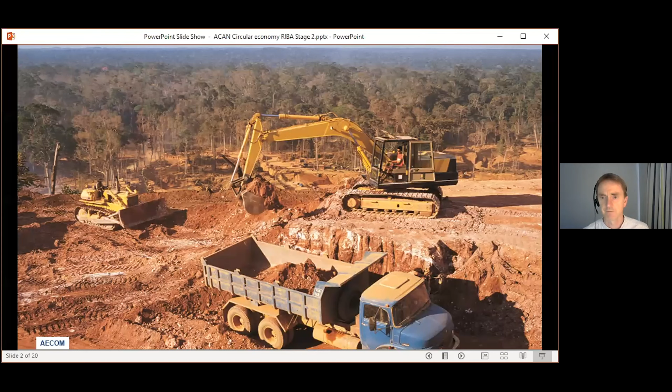So really, this is all about what we have at the moment, which is the linear economy, where we are digging a whole load of stuff out of the ground. We're mining all over the planet, and this is mining for bauxite to make aluminium, and this is in the Amazon rainforest, which just seems wrong on so many levels to be doing that.

And then the other end of the scale, equally wrong in many ways, seems to be that we're demolishing all these old buildings, and sometimes they're only 30 or 40 years old. You think, that is a huge amount of effort, resources, sleepless nights, time and effort that goes into designing and building, and then we end up with nothing much to show for it apart from a heap of crushed concrete that we can't even really use again. I mean, it's used for road bases or for piling mats and things, but it wouldn't become structural concrete again.

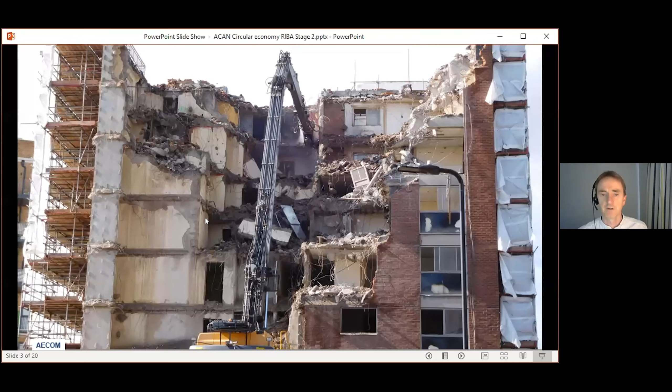So a lot of the time when we're talking about our great recycling, we're actually quite often doing what I'd call downcycling to a lower grade resource. And even the metals are the same, that quite often the alloys are recycled into a lower grade alloy than they were originally. So a lot of waste and a lot of resource use, and that's the nature of the linear economy we're in: dig stuff out of the ground, use it for a while and throw it away.

And I think that the whole premise of the circular economy is that we can start to close that loop and create a much more, keep and retain the value of our resources and materials, and ideally in perpetuity.

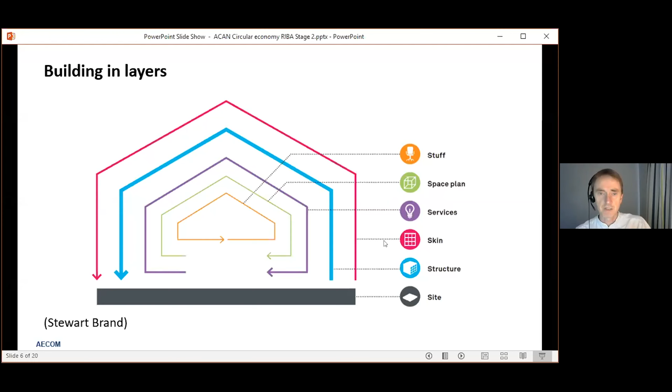If we want to maintain or replace the building services, some of which have a 20-year life, we don't want to hide them behind finishes that might have, say, a several-thousand-year life if it's a ceramic tile. So that's a very useful baseline—the building in layers principle.

To pick up another one, design for adaptability was really interesting to look at when I was researching the book—trying to capture some of the principles that came out of the research, and the idea that lots of old buildings have survived for a long time.

Victorian warehouses and Georgian townhouses are great examples. Some of the features are that they tend to have quite generous floor-to-ceiling heights, really good use of light and space, and feel good to be in—buildings we really like being in.

They have generous cores and are quite often rectangular in design, because that's easier to give you nice clear floor plates, but also makes it easier to build up or out on a rectangular plan form.

One thing we've been doing and promoting is this idea of scenario modeling—you take your existing design and say, what could we convert this into? Are there options to turn an office into a hotel or residential or whatever, and what are the implications of that?

I'm not suggesting every building should be able to be turned into a lab, because that would clearly be seriously over-engineering. But are there options, are there tweaks to the design that might enable it to be more adaptable in the future?

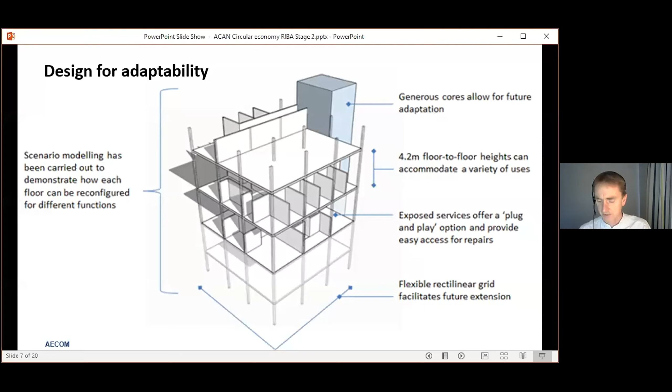There's a scenario modeling diagram—it's something we've been doing for Moorfields Eye Hospital, trying to build in some principles of circular economy and looking at how that building works.

That building has to be—the brief has asked it to be very adaptable, as they've got both UCL research in that building as well as live hospital functions. So they're looking to see how they might change out spaces in there and make it more adaptable, even to the point of having interstitial plant floors, for example.

Being able to change the facade away from—if you want to take out that plant floor at some point—to be able to change that back into a facade that could be used for wards or treatment space or whatever.

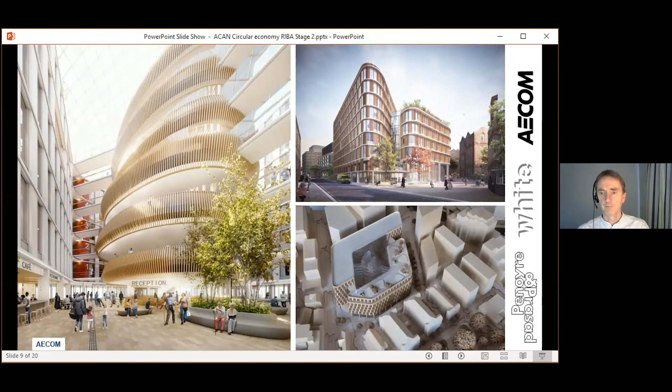And then in terms of design for disassembly, you can be starting to think about disassembling the whole building, and that's the big challenge, I think. At the moment, buildings are really not designed around disassembly in general. But this is just zooming down into the detail here.

So an example is a flooring system that is a dry lay floor tile, which is one of my favorites. It's laid onto a rubberized grid, and then there's interlocking tiles on top of that to create the whole floor. This is used in Heathrow Terminal 5, and it allows you to raise up the floor if you need to get underneath it.

If you've got a raised floor, it means you've got a tea point in a building you could move somewhere else. It means if you crack a tile a couple of months into the building's life, you can change it out without having to suffer it for the next 100 years or whatever.

What we found really interesting is, just imagine if the whole building or the whole interior was designed in that modular dry laid way. What was interesting about the costing, when we did a whole life cost analysis for UCL estates, is that they do cost more per tile, but it takes 2 days to lay this system whereas it would normally take 2 weeks. So as a comparison, you're saving a huge amount on the program and saving money in the process, because you can get straight back on and start your next fix.

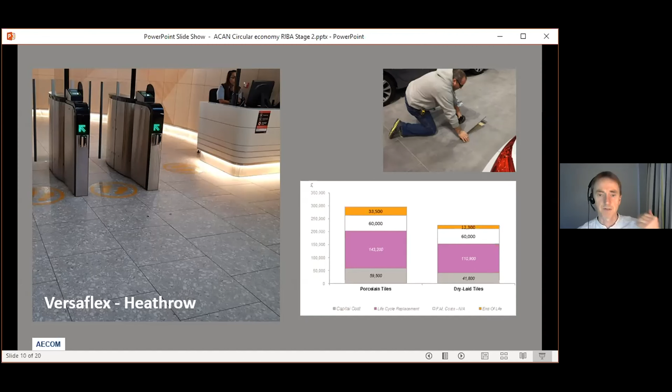Another cool one which just came out last year, I think it was in Edinburgh actually, is the K-Briq, which I think is really interesting. We've been looking at that for a couple of projects now. It's an unfired brick, made from construction demolition waste, and it has the same properties as a brick. I think it's doing a lot of the things we'd want a circular product to do, and by not being fired, you're using a tenth of the energy and a tenth of the carbon emissions of a traditional fired brick.

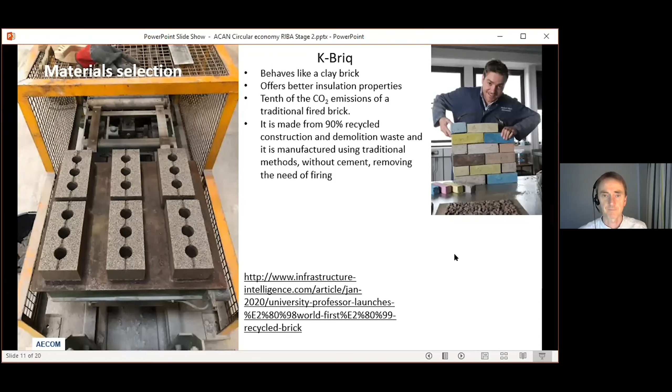Another example which I think is really catching on, and a lot of our clients are really interested in, is reclamation of materials. So this is raised floor tiles, 600 by 600, standard industry wide. There were thousands of them coming out of a building near my office, and I thought, oh great, maybe they're going to recycle or reuse these in some way. But actually, they started to rust outside and buckle.

So we looked it up and found there's one manufacturer called RMF who will actually take back your raised floor tiles that you don't need anymore. They remanufacture them, clean them all up, get rid of all the adhesive they've been coated with, retest them, and re-warranty them - that's absolutely critical for reuse. The problem is often that you don't have that backup from the manufacturer saying yes, this product is fine to reuse. They'll sell them back, and actually they're cheaper than new ones, roughly 25% cheaper.

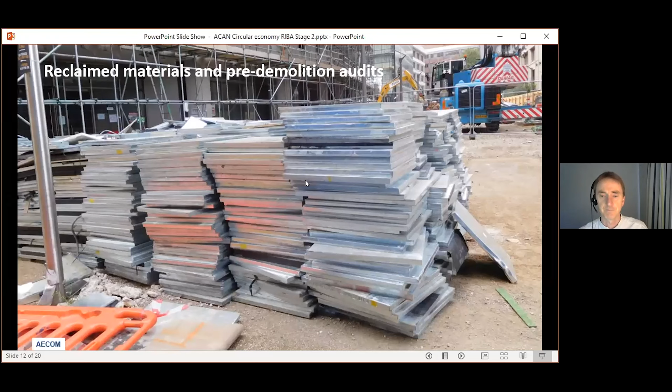So you think, crumbs, what isn't to like here? And actually a lot of our clients are agreeing and saying that they are going to reuse them. And then I think the other one that's really interesting is this idea around the way that we currently consume things.

So the manufacturer makes something, we buy it, and then we're responsible for the whole of the rest of its life. So we have to maintain it, upgrade it, and pay for the disposal. And something like lighting, for example, the disposal costs are a special waste, so it has to be looked after - it doesn't just go down the standard waste streams.

Lighting is another good example in that it's something that is moving very quickly as a technology, and upgrading has huge benefits. So this idea was used by a few people.

Philips have offered lighting as a service - it's called Payperlux - and Schiphol Airport do it. They didn't pay anything up front, and then they pay a monthly or quarterly charge for the use of the lighting. They even have models around energy efficiency, so not only is it a circular principle, but if your energy use goes above a certain pre-agreed amount, you pay less rent for that quarter or month, which I thought was a really interesting idea. I think lighting is difficult to see how that would work in lots of commercial buildings, but even residential buildings too.

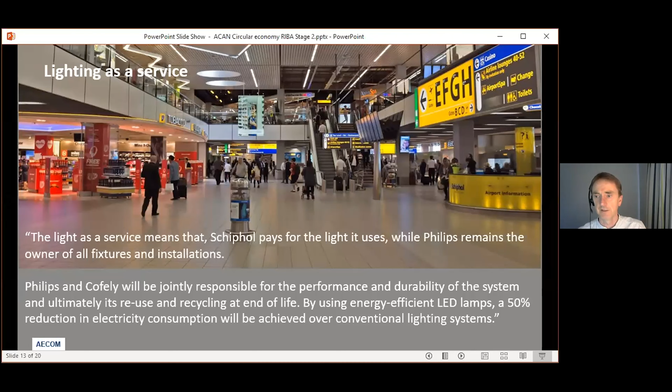I think the more general business models is another interesting area here that captures lots of things - remanufacturing. Remanufactured paint is something that's well up and running. Paint 360 takes waste paint from construction sites, and there's so much of the stuff that they are turning it away, and it's all pretty high quality. Generally we all spec high quality paints, so they get a very high quality of waste paint, and they can remanufacture it into any colors and any types of paint that you want.

What I love as well is that it's a social enterprise, and they are bringing people into work who probably wouldn't have been employed otherwise - so all round a really good one. It deals with a waste stream that is currently problematic and is quite often incinerated, or people just dump the paint on top of other waste, and it gets mushed in with all the other stuff on the skip. So lots of advantages here, I think.

What's been interesting is the take-up of circular economy ideas. There's lots of clients we're working with who've built that into their briefs now, and are looking very seriously at the advantages here. This is one example from Clarion Housing for their Merton redevelopment project, which I think is a 4 or 5 year redevelopment, and they've picked out some really key savings and some things you wouldn't immediately think of.

As well as saving loads of money on waste disposal and requiring much less virgin materials, they're also saving on impacting the local community by not having so many lorries thundering past other houses full of waste. So I think it's a really elegant solution, and very applicable to long-term regeneration projects.

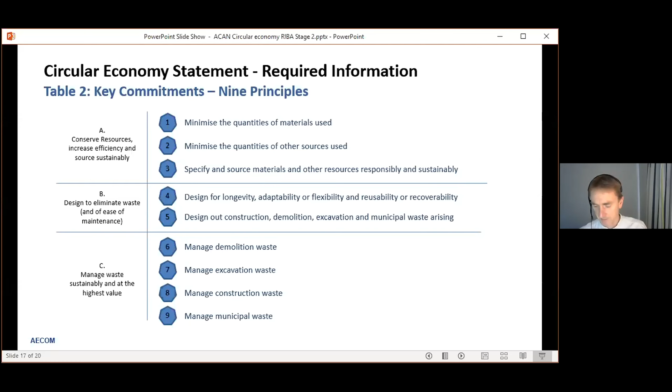I thought it worth mentioning - I've put a link in there. We've been working with some brilliant people at the University of Sheffield on creating the Regenerate tool, which is trying to help people at those early design stages think about and challenge the design, and think about what the circular economy opportunities are at those stages. There's a tool you can download and have a play with. It's still a downloadable spreadsheet, but we're working on a fully online tool that would allow you to go through the principles I've just talked about and pick out some interesting ideas - you'll see that soon.

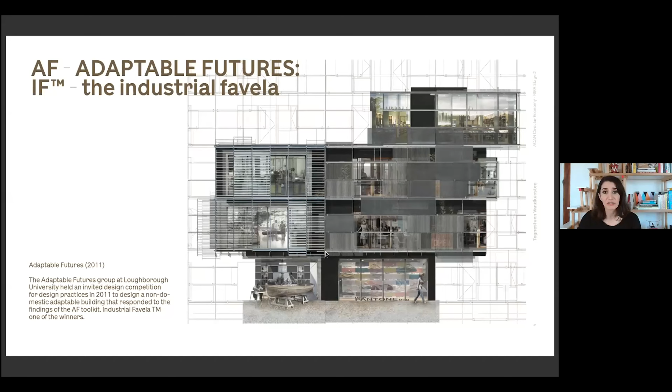I'm not going to show you the project itself, but one of the principles it was about: we have two different schools of architecture. Industrial production, which we architects know well, is a top-down structure, a vehicle to deliver building practice based on easy assembly technology, precision, affordability, and scalability. In contrast, we have the notion of favela, and regardless of the social status of the buildings or users, vernacular architecture is a bottom-up structure that functions based on local democracy, user control, individual actors, and do-it-yourself operators. So this project was a hybrid system of these two schools, taking advantage of both.

How? The backbone of this project was this diagram, and thanks to Dan and David, we learned a lot. I'm not going to focus on the left side of the line, which we went through already. It's about design for disassembly, layering, flexibility, multifunctionality, reuse, and recycle. We learned all these tools.

I would like to focus on the right side of the diagram, which is the social sustainability, and how it frames itself in the cultural context of the project to deliver the lovability quality. How we do it is that as designers, when we use all of these other tools, we put on the glasses and ask: how does this system work with the identity of the project? How does the combination of materials work with tectonic articulation and sensuality?

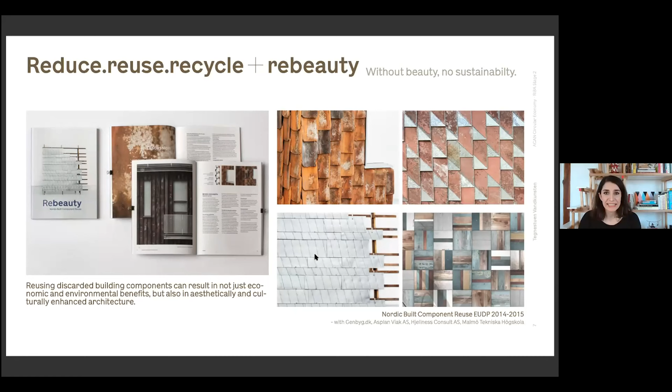We shouldn't forget that. These prototypes were exhibited in a Danish pavilion in the Venice Biennale 2018. For example, this is origami-folded metal plates. These are flattened ventilation channels, and we adore this sort of aesthetics. And here are reused roof tiles and reused windows.

We dived very deep into all of these 25 prototypes, and there's a publication you can download from our website. All of these designs are open source, so everybody can adapt them in their projects, along with all the business plans. It's researched very deeply, so if you like, you can take a look.

Another tool we use in our design phase, which we recently helped create, is this construction pyramid. The design phase is when we don't take final decisions, but many of the main decisions are made, and we shouldn't take wrong ones. This material pyramid is one tool that helps architects and designers in the design phase, and it's very easy to communicate. It's not very user-friendly to show LCA and LCC calculations in the early design phase to clients or users, but this is.

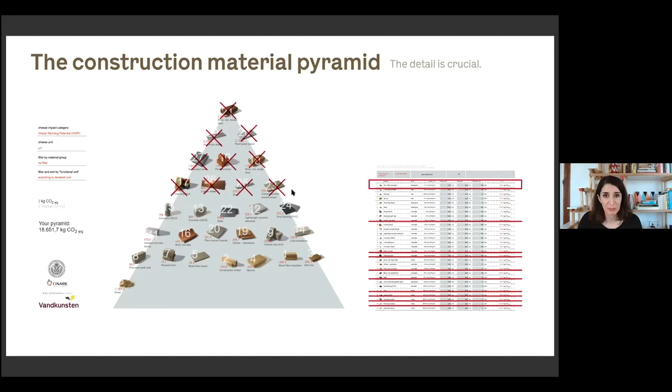This is based on the food pyramid that we all know. For example, at the top are the high-carb, sugary materials that you should minimize, and it's exactly the same here. At the bottom is the more healthy option. How can we have healthy buildings? It's a good tool to communicate.

And now, my darling project: Hall 7, which we did in 2016. It's located in Roskilde, in Musicon. Roskilde is around 40 minutes by train from Copenhagen, and Musicon is a district where the municipality has a very progressive agenda. It's going to be a new district centered on creative and cultural associations and institutions, and this is Hall 7.

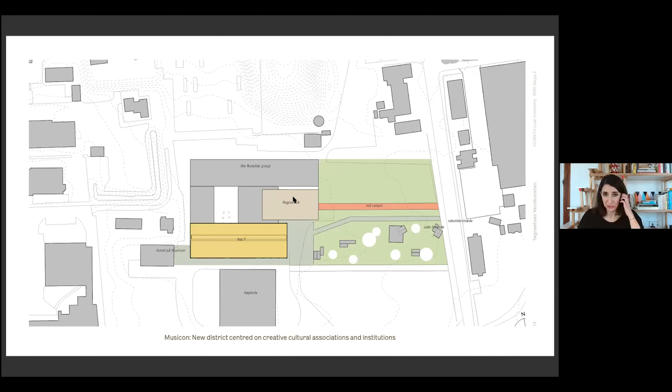This is Hall 7 to the left, and we have such a glamorous neighbor: a museum of rock music. The municipality gave access to this hall for only 10 years, so the project was designed to be temporary.

Makers had already some containers that they were using as storage. We thought, to minimize waste, why don't we give them more retired containers, so when these 10 years are over, they move out with these new containers, with these new facilities.

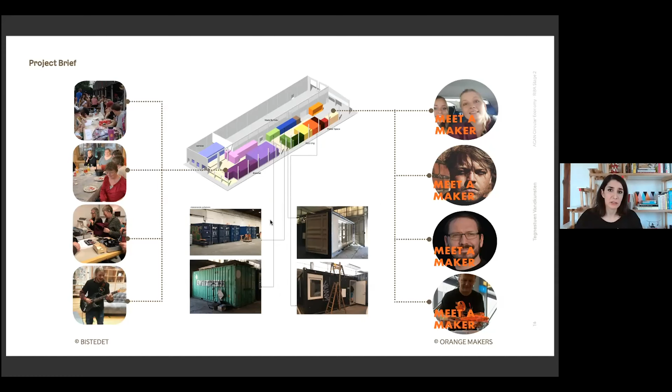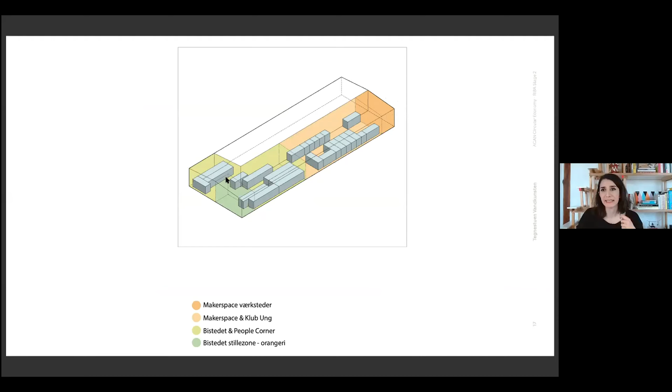We had a group of workshops with them, and this is the organization of the groups in the hall. The makers group was located at this end, where they have the workshop and where the action is happening. This was the group for the Bistedet group, and they have an orangerie at the end. In this corner, we placed the kitchen and washroom as an excuse for these two groups to interact with each other.

This is the climate zone diagram. Because this project was temporary, it was not an option to insulate the whole hall for just 10 years. So we came up with the idea of defining different climate zones. The gray is the open hall, which in winter is as cold as outside. The yellow is the middle climate zone, around 17 degrees in winter, where one can sit comfortably with a pullover. The blue is the comfortable climate zone, fully ventilated.

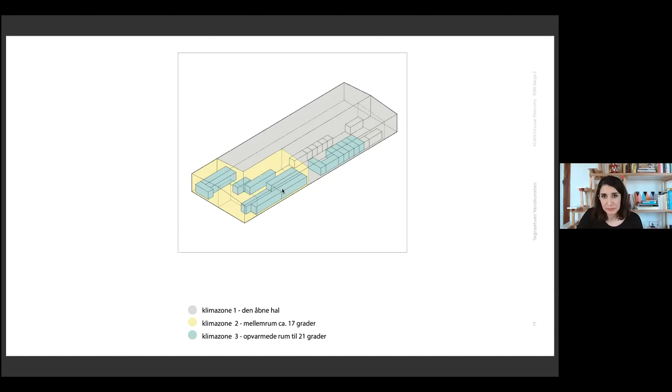Because when we apply circular economy in the project, we need a bit of flexibility later on in the next phases. So as soon as we had the main concept, we solved these two issues, accessibility and fire.

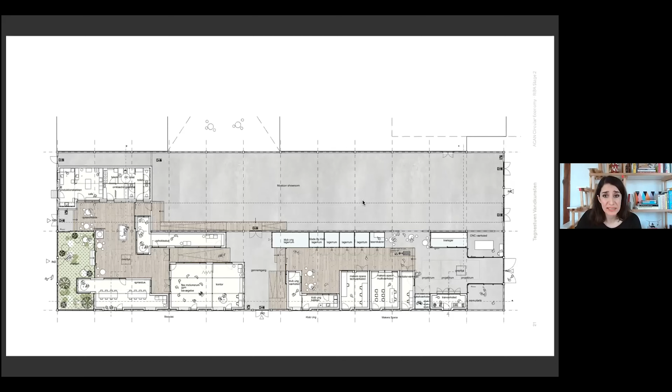To come to this concept, we had very close workshops inside our studio with both groups to hear what they want and how we could deliver the best. This is the activity plan we gave them in the beginning, and this is the as-built plan. As you can see, there are some revisions, but we don't have any major changes later in the phase, so it was useful to do that.

This was the floor of the hall, and because it used to be a factory, it was pretty damaged. An easy solution could have been to just cast concrete on top and level it. But when it comes to concrete, we are very cautious—concrete is always a loser when we calculate CO2.

So we made many visits to the hall, mapped and traced all of these cracks, and mended them with the minimum amount of concrete. It's a way to keep the history of the hall. We call it the kintsugi floor, like the Japanese mending technique used to mend broken china.

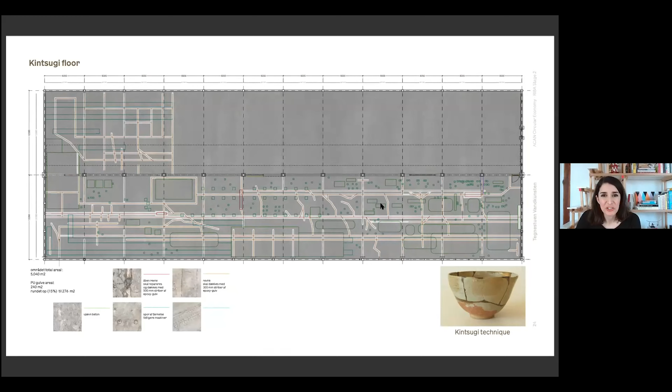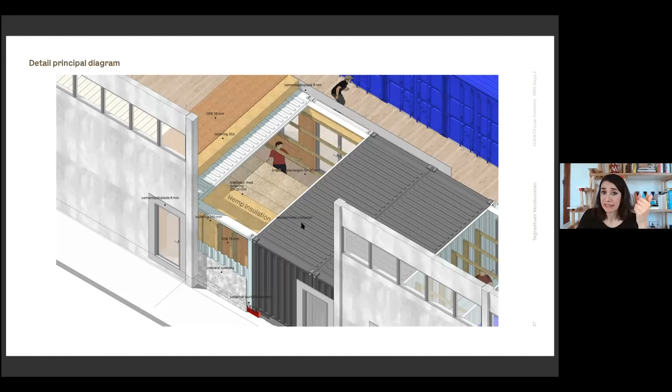This was a diagram we drew in the beginning, showing how it's fully designed for disassembly. Many of our detailed drawings in the tender phase were based on this drawing. This is, for example, the laser workshop—in 10 years, they just have to loosen all the fittings on the door and installation, and then the container is ready to find its new place.

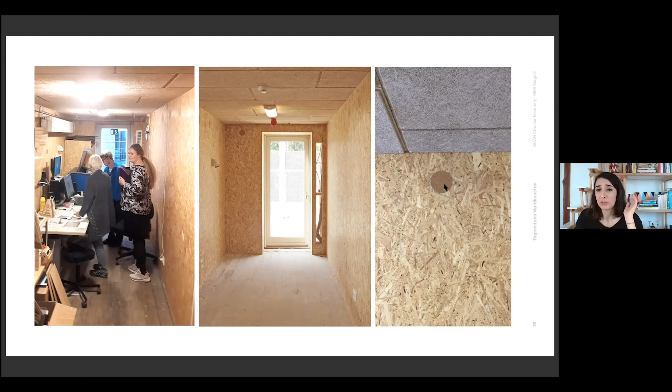When the lifetime of the container is over, they have to open this cork fitting, which is also an architectural motif around it, and with a suction machine remove all the hemp insulation. We use hemp insulation because you can reuse it 100%, and then they can unscrew the rest.

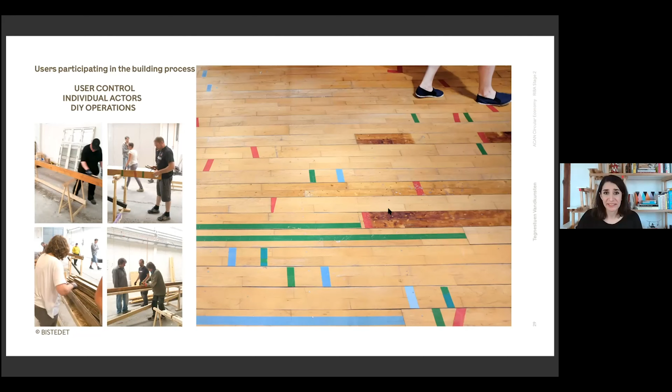And they were also involved in building that. It is L-shaped, so the social aspect of it is they can have a hygge time. I think you know what hygge is, thanks to Sandi Toksvig.

This is the workshop where all the creative people work, and they have different wood workshops and metal workshops.

And this is the orangerie at the back. And you can see all this kintsugi floor and reused windows, and how homey they made this orangerie.